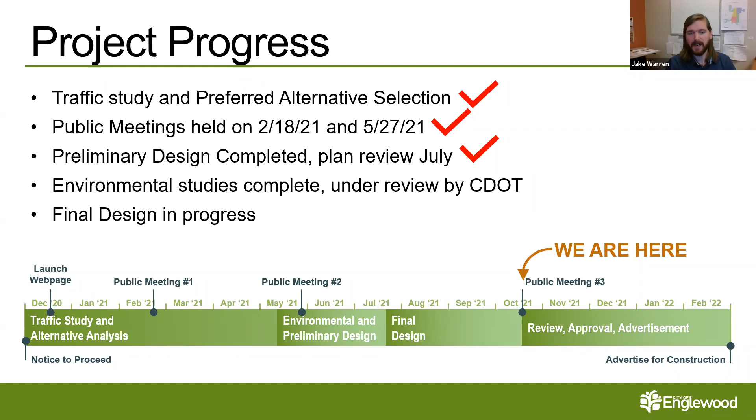So before I let Dan and Scott talk about what's being proposed, I just want to give a quick reminder of the project goals and give some context to the changes that are being proposed.

First off, we want to improve traffic flow on 285. We want to improve safety for both drivers and pedestrians. We want to improve the aesthetics and branding throughout the interchange, such that it serves as a gateway to the nearby downtown Englewood. We want to improve the interchange experience for multimodal use, such as pedestrians and bicyclists. And we want to improve drainage, so we reduce the frequency of stormwater backups, primarily on 285, where that has been an issue in the past.

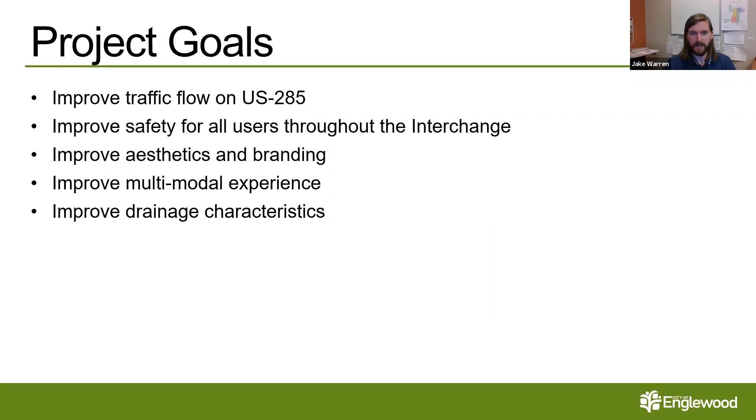So with that, I'm going to hand things over to Dan, and I think he's going to start off with talking about the preferred alternative. Dan, I think you're muted. Yeah, sorry. Thanks, Jake. Thanks everyone for attending tonight.

So the preferred alternative that you see here on the map is the result of the work that we did. As Jake said earlier in the year, we did some traffic analysis, and we studied various alternatives for interchange types. This was the alternative that we moved forward with in our designing and are going to move forward with construction.

Some of the aspects that you see with this preferred alternative, if you look on the south side of 285, that intersection with the ramps down there, you can see it's moved north of the existing location. So this is the alternative we refer to as the tight diamond, kind of making that diamond configuration of the ramps even tighter than it is today.

That has a few different benefits. It does provide some additional buffer space on the south side to some of the residential areas, some opportunities for improved multimodal access to that southwest quadrant. It does have some traffic operational benefits to have the signals functioning together in that aspect with the interchange. So this was the alternative that was picked as the preferred, and it met the goals and the traffic conditions the best.

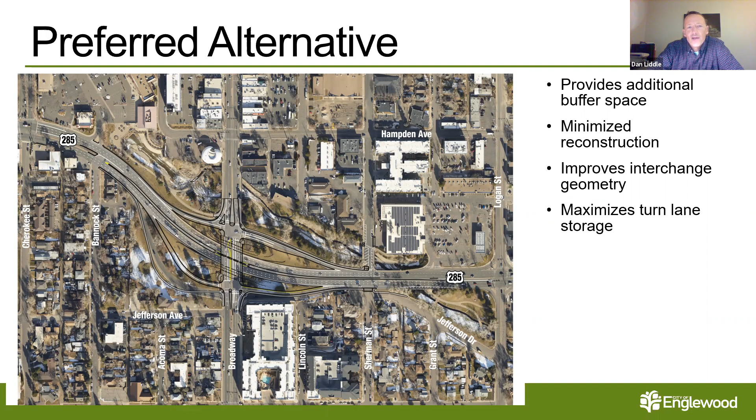In addition to adding the third through lane on US-285, we've also added another lane on the bridge on South Broadway for northbound to westbound traffic. The bridge is similar in width to what it is today, but we were able to fit an extra lane on there for improved traffic operations. So that's some of the highlights of the preferred alternative.

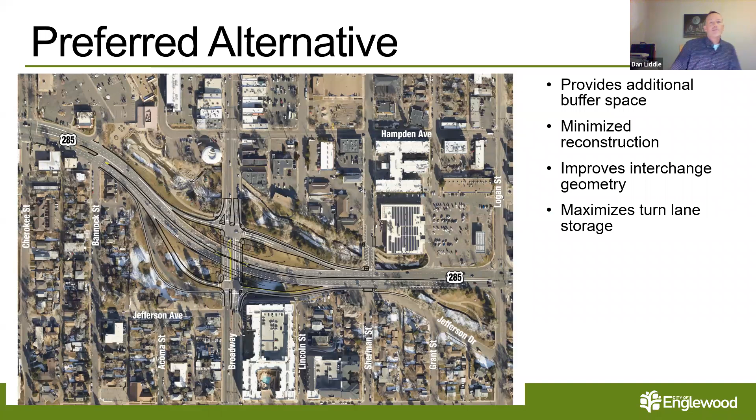The other thing we've studied throughout this process was what the structure should look like. We looked at several alternatives, and this is what we selected as the preferred alternative for the structure, which is a two-span option.

You're starting to see some of the aesthetic elements that were implemented in this design, and Scott will get into that a little bit later.

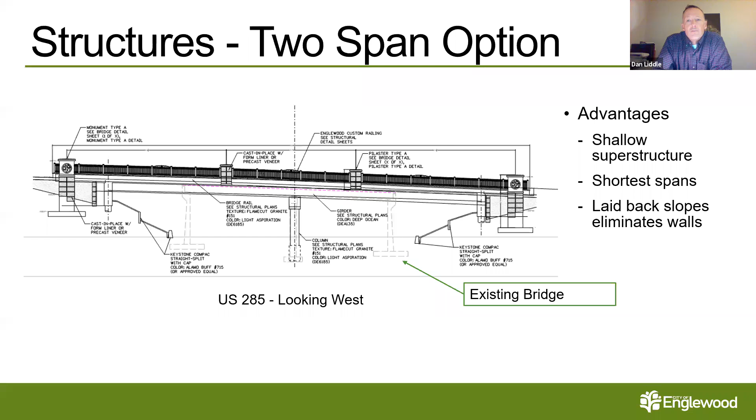The next thing we want to talk about is how we're going to build this project. As you know, this is a pretty tight, constrained area, and building this is going to take some creativity.

Because of the limited widths we have, we'll be reducing South Broadway traffic from 2 lanes north and 2 lanes south to 1 lane north and 1 lane south. That's a reduction in capacity for a short period of time. We've looked at the traffic operations, and there will be some increased delays in this area, but within reasonable expectations. Through public campaigns and outreach, we feel there are other routes people can use if they're aware of the construction.

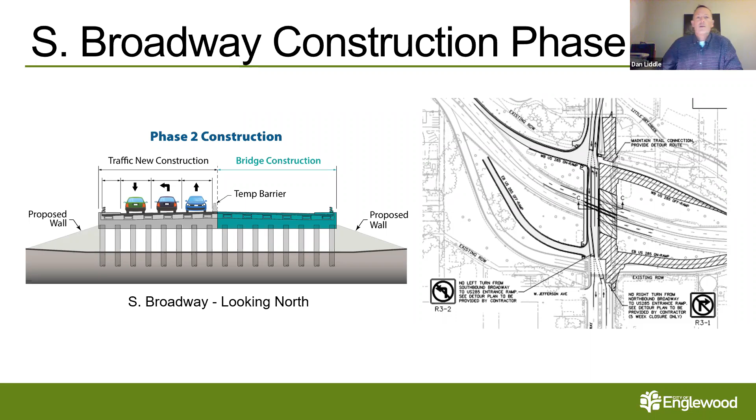This next slide will show the detour for that left turn movement that we're restricting to get onto US-285. We've looked at the volumes for that movement—it's one of the lower volumes at the interchange. We've selected using Old Hampden Avenue to Sherman Street and then back down to 285 through that signal as our detour route for that left turn movement.

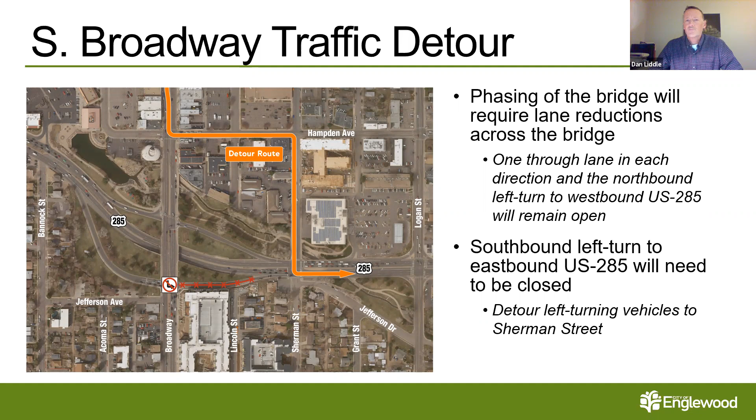So, as I said before, once we get the bridge constructed, that opens us up. Now we have a longer structure under there, and we can start to work on the reconstruction of US-285.

For this alternative, once we have that westbound 285 reconstructed, there's actually enough width using the detour pavement we built to shift all of US-285 traffic, 4 lanes, onto that north span of the bridge, and we can build out the eastbound traffic under phase 4.

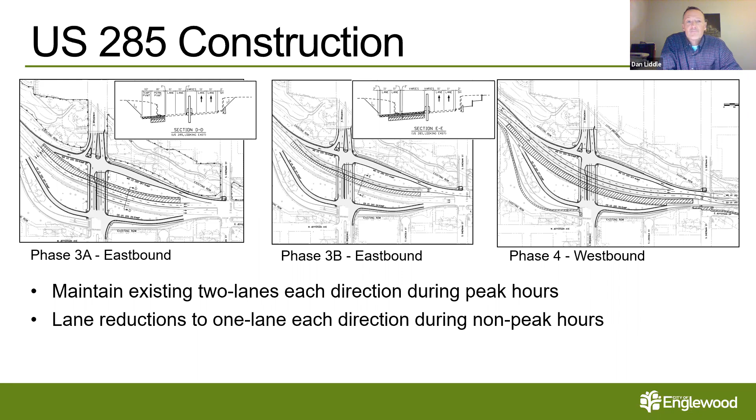I'd say the other first thing is getting the bridge down too. That's another critical safety element that we'll be detouring traffic around for. So at that point, we'll have the project constructed.

So to summarize the schedule of how long it's going to take to get through those phases, we anticipate getting through the final plans, getting CDOT concurrence, advertising the project and selecting a contractor, going through city council to get the contract awarded to the contractor. There's several steps we still have to go through before we could start construction, but we anticipate getting through those steps so that we can start construction the beginning of July.

The first activities would be the phase 1 and phase 2, building the bridge and the South Broadway work. We anticipate that'll take approximately 10 months, about 5 months for each of those phases, which will take us into the spring of 2023, at which time we can start building US-285 reconstruction through the summer of 2023 and into the fall, and anticipate having construction completion by the end of 2023.

I guess the only thing I would note is there's a lot of things we have to do in order to get this. So this is our anticipated construction schedule. If we get held up in any of those steps, that could have an effect on the schedule, but I feel pretty confident at this point that we can do this.

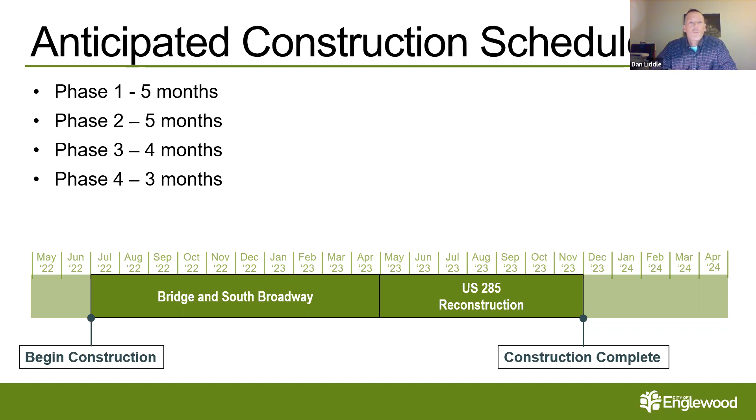So as part of the design work, we've been doing environmental studies. This is a federally funded project. There's partial federal funding for this project, so we have to do NEPA clearance, and there's several environmental resource studies that have been completed. You see the list here: air quality, noise, cultural or historic, biological, hazardous materials, section 4F, 6F. So all those studies are completed.

CDOT's reviewed several of these. They're finishing some of these up. We have found no significant impacts from any of these studies completed to date. And I think part of that is we've been able to stay within the existing right of way of the CDOT in the city of Englewood.

So that's what you see here on the left, that's the historic resources map, and that's what we call the area of potential effect. That was the study area that was studied for these environmental resource studies.

And we've gotten through, as far as cultural historic is concerned, an eligibility determination with the SHPO, the State Historic Preservation Office, and we have submitted the effects determination stating that there were no effects as a result of the project, and we're just waiting for SHPO concurrence on that.

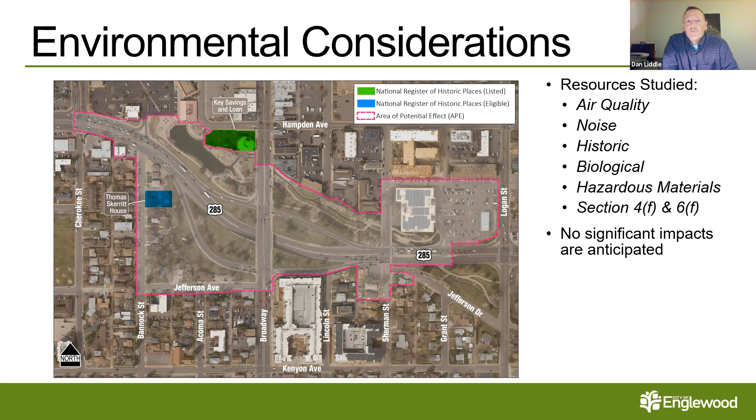So, next slide. I'm going to hand it over to Scott to talk about maybe something more fun, which is some of the landscape aesthetics and branding elements for the project.

All right, well, thank you, Dan. Yeah, so when it comes to aesthetics for this bridge, we're focusing on 3 different items. All of them have to do with your experience, whether you're coming across the bridge on Broadway in a multimodal bike experience or walking, or whether you're driving underneath it and it serves as this entryway into downtown Englewood.

It's this place, this threshold that you pass through. So those are the different ways we were looking at this element, this landscape.

What you're looking at here has evolved a little bit. This was a preliminary exercise, what we dubbed the bookend columns. You have two columns on either side of the bridge with this span across, as Dan talked about before. You can see the walls tiered, though they'll actually be a little bit lower than shown here.

We're also trying to plant the inside of this. So we're taking the experience, which is this really tight corridor, and opening it up, laying those walls back and creating a planted landscape. Visiting the place today, you experience seasonality, seasonal interest, flowering trees that change over, and we're trying to bring that element forward into this future plan.

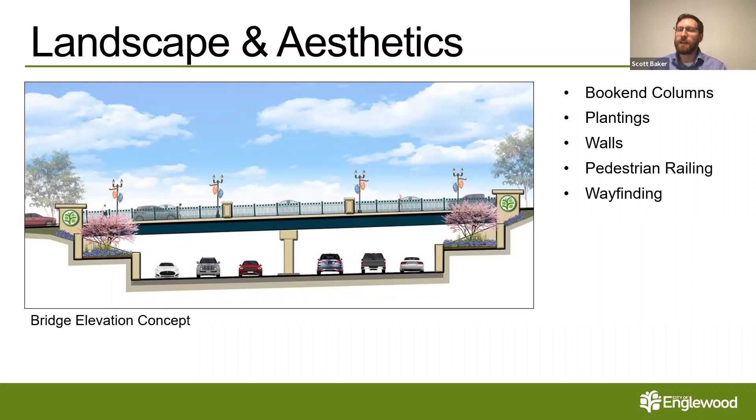Those are the areas we're planning to plant with seasonal flowering and interesting plant materials, but they're all native or naturalized to this climate, so there'll be low water use.

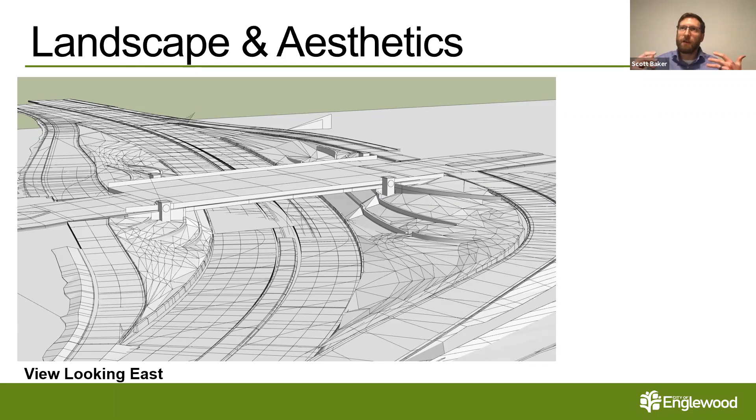This is the view looking east, so we're a little bit higher up. You can really see how those walls tie back into the bridge and continue underneath, creating this flow between the two sides. You've got the tiers on both sides, creating a very open and welcoming form.

This graphic is showing our detailed planting plan. There's a lot of nuance to the planting materials going into this section along the 285 highway, which you'll also experience as you walk or bike across Broadway.

The blue text highlight at the top is the proposed entry artwork, an opportunity for public art in this median. Our plan is to keep the plant palette fairly simple, with some low materials around a site for artwork that creates a moment, a monument as you enter downtown heading north on South Broadway.

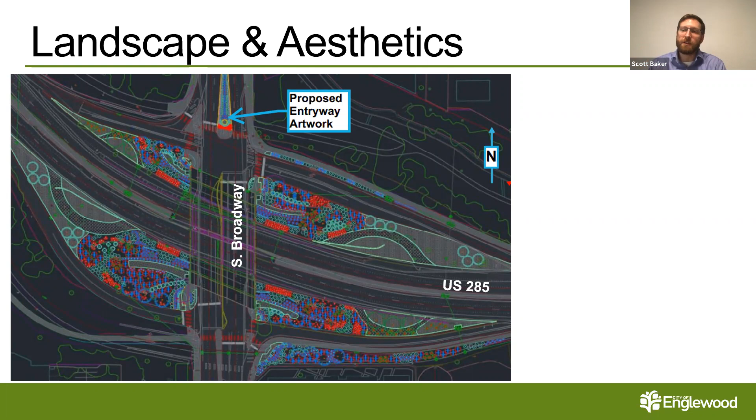The other experience here is being a pedestrian or cyclist moving north or south through this corridor. We're looking at about a 10-foot wide walkway on either side of the bridge. We do have constraints in terms of cost, structure size, and those sorts of things.

So we have an attached walkway, but we've moved the light poles. In the existing condition, the light poles are pushed up against the railing, and now we've moved them out to be about 2 feet off the curb. That creates a nicer walkway experience between the railing and the light, a bit more open in feeling than the current condition.

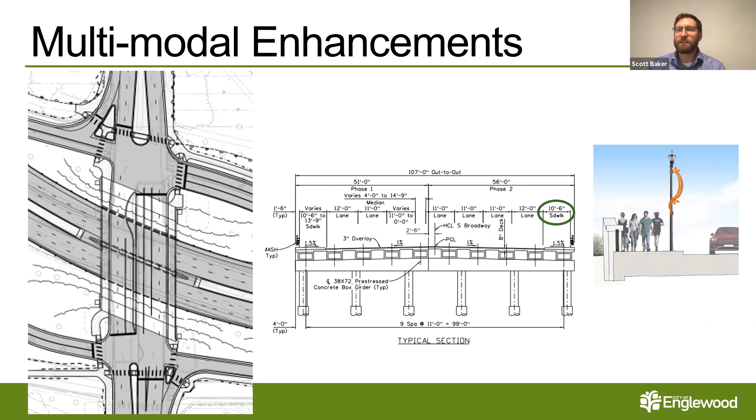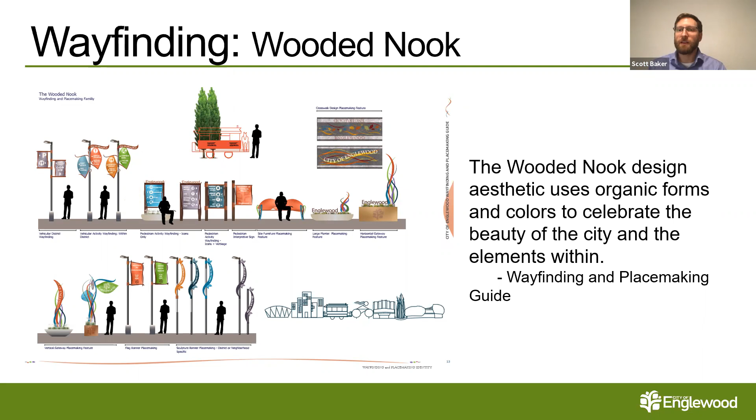Finally, we have the wayfinding wooded nook concept. I believe this is the final form for this placemaking guide, and we wanted to pull some of these elements forward into our design plan. You've seen them through some of the other graphics and images, but it's really about creating this wooded nook idea for the city of Englewood, and we're trying to pull that theme through this project.

And I think, Dan, that's back to you. Yeah, I can take that.

Going back to the other slide, we're still working through the wayfinding guide signs, locations, and messaging that those wayfinding signs are going to have. We're still working through some of that, but what you see there is what we're proposing the signing would look like, pulling in the guide that was prepared by the city in the past.

One of the key components of the project, as we've discussed in the last two public meetings, is closure of the Sherman Street intersection, where there's currently a traffic signal. It's a safety issue, too close to the ramps, and just a poor location for a signal. So part of this project is to close that signalized intersection.

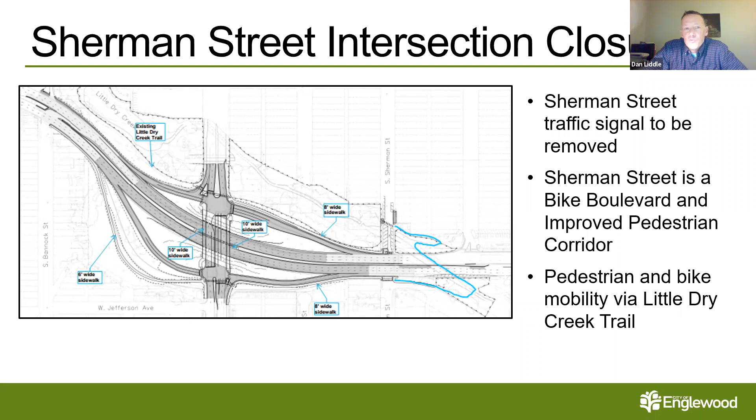Beyond adding the third through lane on 285, replacing the bridge, and upgrading the interchange, this created a lot of opportunity for us to implement other things as part of the project, like landscaping, aesthetics, and branding elements, and improving that multimodal connection.

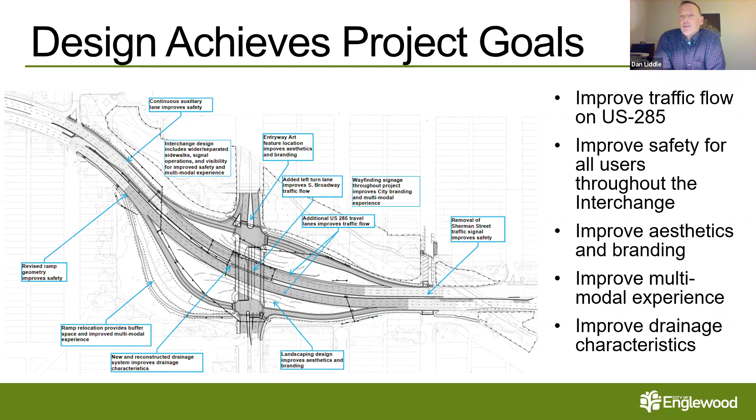We'll also review with stakeholders within the city of Englewood and others on the project in November. Then we'll be looking to wrap up 100% plans for advertisement the first part of next year, and get those in front of CDOT so we can get authorization to advertise. So we're on schedule so far and continuing to push forward.

I think with that, we're ready to open it up for questions.